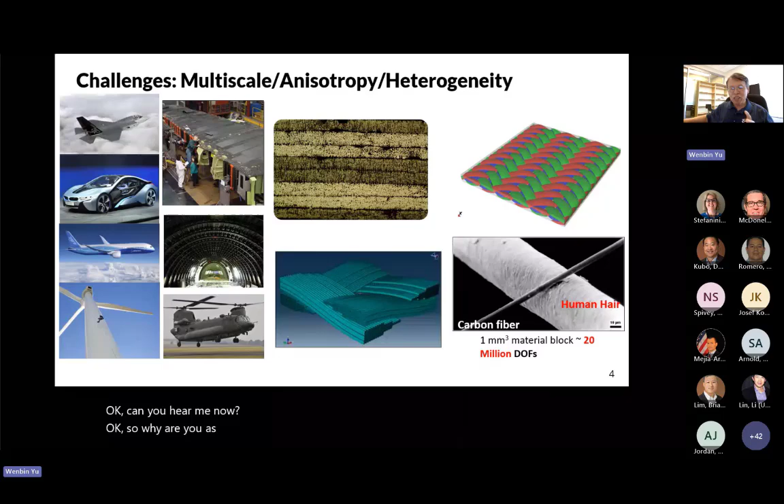I think you've been muted. Can you unmute? Wenbin, you just went mute. Sorry, I clicked the wrong button. Can you hear me, Dr. Yu? He's still mute. Where do I need to go to unmute? Okay, can you hear me now? Yes, sorry about that. Okay, so Guan Yu, as a host, you should be able to unmute me, right? Can you? You are good now. Okay, good, we'll continue. I don't know what happened there, but let's continue.

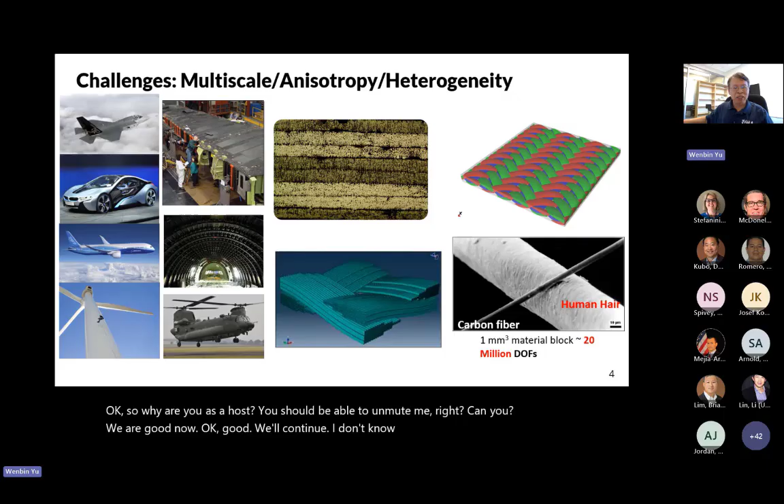So we build systems in the size of meters or hundreds of meters, but because we want high performance and lightweight, we use carbon fibers mostly and glass fibers. They are in the size of microns, and clearly these composite structures are anisotropic, heterogeneous, and multi-scale.

It's impossible for us to capture the structure performance directly while at the same time capturing the details of carbon fiber and all the reinforcements. So some type of multi-scale modeling and homogenization must happen.

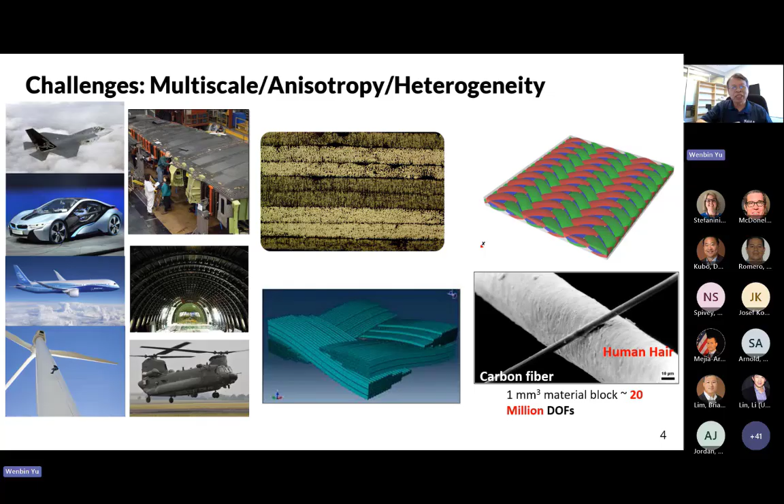And of course, in the field, in the past several decades, we have numerous multi-scale methods developed, but most of the methods are what I call a bottom-up approach. What I have been looking at—because if you know my background, I started from how to model rotor blades, so it's structural mechanics—I would like to look at the system from the top-down level.

So for a sophisticated system like the Boeing 787, when you do structure analysis, it's a combination of 3D solids, 2D plates and shells, and one-dimensional beams or thin-walled beams, depending on the geometry of the structure.

If the three sides of the body are of similar size, then you treat it as a 3D body. If one dimension is much smaller than the other two, you model it as a panel, which could be curved or flat, shell or plate in the modeling concern. If one dimension is much larger than the other two, you have beams, and beams of course could be curved. If all three dimensions are of different order of magnitude, you have thin-walled beams.

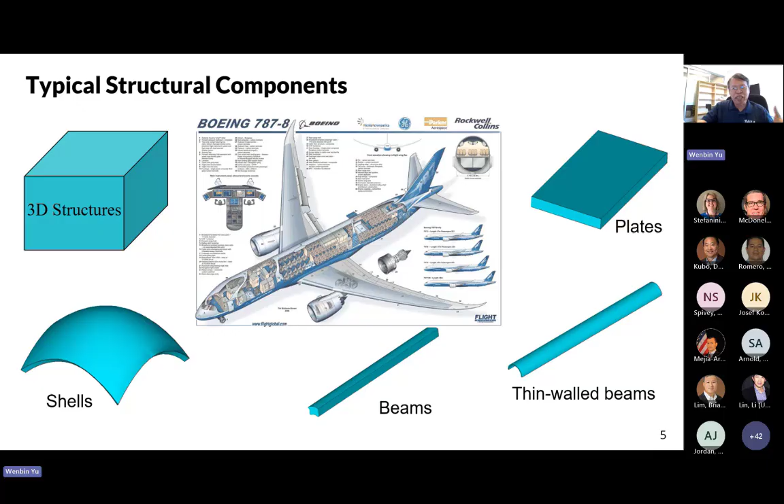Of course, when you model it and do the numerical analysis, you have beam elements, plate elements, and shell elements.

So from a top-down perspective, to design a structure, we first decide what kind of structure elements we will use. Then we identify how the structure is made, what kind of microstructure it has, and what information the material folks can provide us. So we could have what I call the structure genes, the fundamental building block of structure.

Then you effectively have two model representations. The method I created, called Mechanics of Structure Genome, minimizes the information loss between the microstructure and the structural representation needed at the system level.

It is a formal framework compared to most other multi-scale methods that do not exclusively rely on direct information passing through the scales, but rather operate from the homogenized behavior you want at the structure level, then capture details at the scales relevant to a particular design need.

For example, we may want the torsional stiffness or bending stiffness of a wing in terms of a particular wing configuration. This is also part of this framework. We implement our theory into a commercial code, now called SwiftComp, which can carry out general purpose multi-scale constitutive modeling for composite structures and materials.

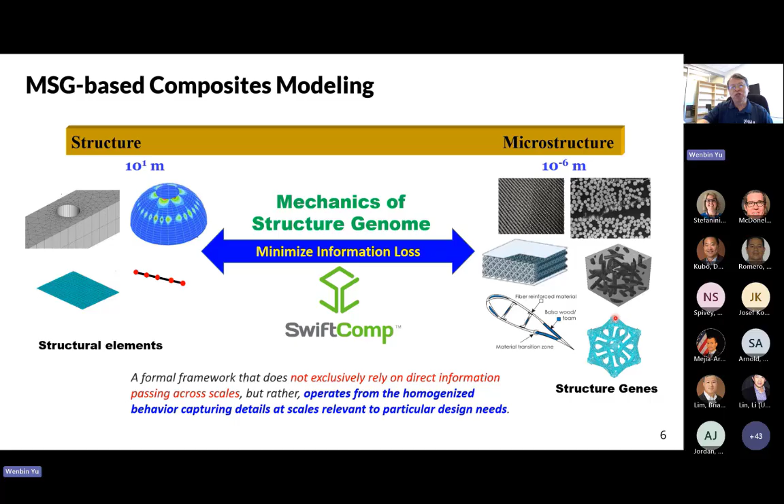And you'll also realize I define composites in a very loose term, as long as it features anisotropy and heterogeneity, that's a composite material, not necessarily the traditional unidirectional fiber reinforced laminates.

The concept of structure gene and structure genome is borrowed from biology. A structure gene is the smallest mathematical building block of a structure.

So do pay attention to the word mathematical, which means if you can carry out the mathematical operation of representation to build the structure, then that will be okay. So you need to go to the smallest. Then the structure genome is basically composed of all the structure genes.

You could have different structure genes for one structure, but they need to form the structure. For example, if you want to model a rotor blade using beam elements, then each cross-section is a structure gene, but the complete set of structure cross-sections used to represent the blade becomes your structure genome.

The structure gene could be one-dimensional. For example, if you deal with laminates, a one-dimensional structure gene will be good enough. If you're dealing with unidirectional fiber reinforced composites, you can deal with a two-dimensional structure gene. And of course if you deal with a beam, you deal with a cross-section, that's a 2D structure gene.

But if your building block of structure indeed features three-dimensional heterogeneity, then you need a three-dimensional structure gene to represent that.

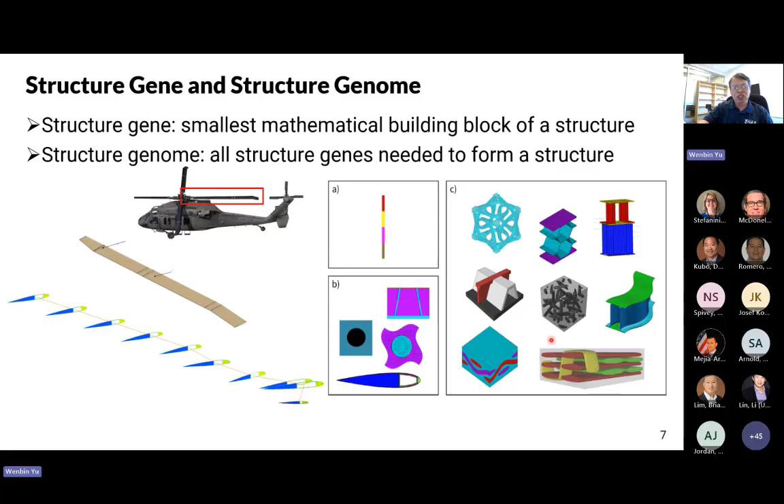To further explain the concept of the mechanics of structure genome, I will use beam theory, which is familiar to everyone in the audience right now, as an example to explain how we do the problem, and how MSG relates to the ancient theory of beam theory.

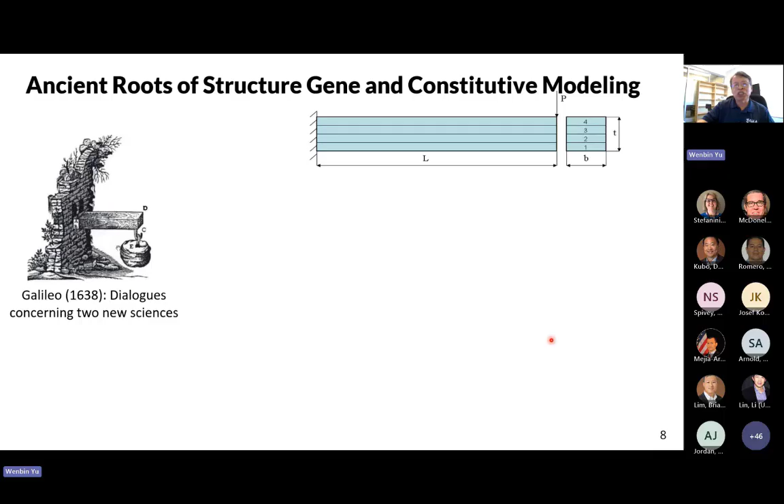For example, when we try to model a cantilever beam, what we do is look at the beam and what it's made of, then take its cross-section, and compute the so-called beam constants: EA, EI, GJ, and GA, which is the transverse shear stiffness.

And then we basically homogenize it to a one-dimensional problem to solve a deflection problem, for example. But we didn't stop here, we need to go back.

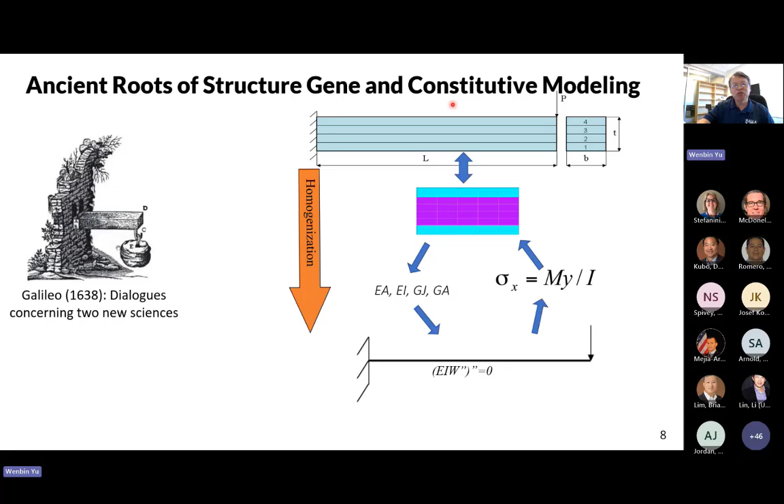And you'll find out that going from the original three-dimensional structure to this one-dimensional representation is a homogenization. And this beam analysis is the macroscopic analysis, if you want to call it that.

And then to get the stress in terms of the shear force and bending moment diagram, this kind of stuff, that is dehomogenization. And this procedure is the constitutive modeling. Of course, this does not appear in our undergraduate mechanics of strength of materials course.

Because we make assumptions, then this calculation becomes simple. But usually those assumptions only work for isotropic homogeneous materials. When you go to composites, a lot of assumptions are not realistic, and then you need a theory to do the constitutive modeling. But you still solve the same problem, although your structure is made of more advanced materials enabled by current manufacturing techniques.

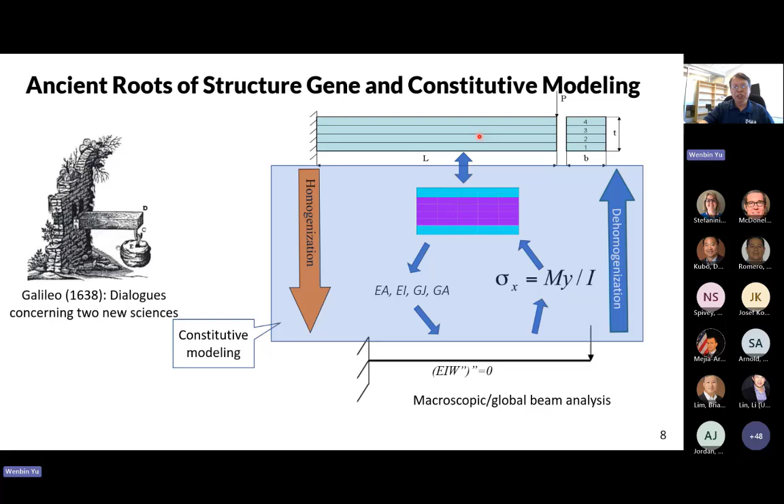I also want to explain a little bit more about the structure gene concept. As I said, if this system level analysis requires 3D solids, then you look at your microstructure. If it's a layered material like a laminate, you want the 3D properties, then you have a one-dimensional SG representation. If you have unidirectional fiber reinforced composite, you have a 2D representation. If you deal with woven composite, you need a 3D.

Despite the different dimensionality, you can call it the representative volume element, but it is not. I call it SG here. The 1D, 2D, 3D - what you want is, for example, for linear elastic analysis, you want the 6x6 stiffness matrix for your 3D elements. And also, after you've done the global analysis, you want to go back to find out what would be the critical stress inside the original microstructure.

So this one-dimensional analysis can compute all your shear modulus, Young's modulus, Poisson's ratio, and also can compute all the stress components, although it's a one-dimensional analysis. Similarly for this two-dimensional analysis for unidirectional fiber reinforced composites, the same purpose can be achieved.

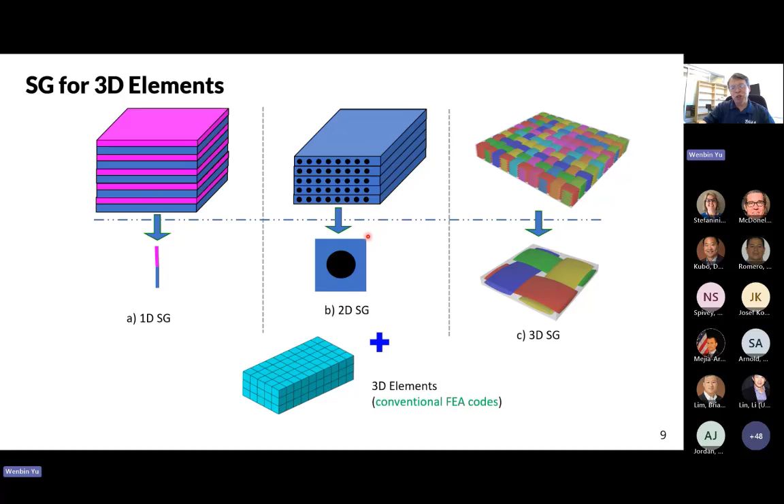But most of other approaches, particularly finite element-based approaches, if you're based on 2D domain, you can only get the two-dimensional properties. You have to try very hard to get the transverse shear modulus, for example, also get the out-of-plane stress components.

And the same idea can apply to panels. For example, you have a panel you want to model as a plate in your structure level analysis. If the panel is made of laminate, then you have 1D SG. If you have a corrugation along one direction, you have 2D SG. If it's made of woven or the stiffness runs in both directions, you have 3D SG. What you want is the equivalent plate properties for your plate analysis.

For example, if you're dealing with Kirchhoff plate analysis at this level, then you're talking about computing the ABD matrix from this guy, or from this guy. After you've done your plate analysis, you have force and moments, then you can do the dehomogenization to get the stress that happened at the original real structure level.

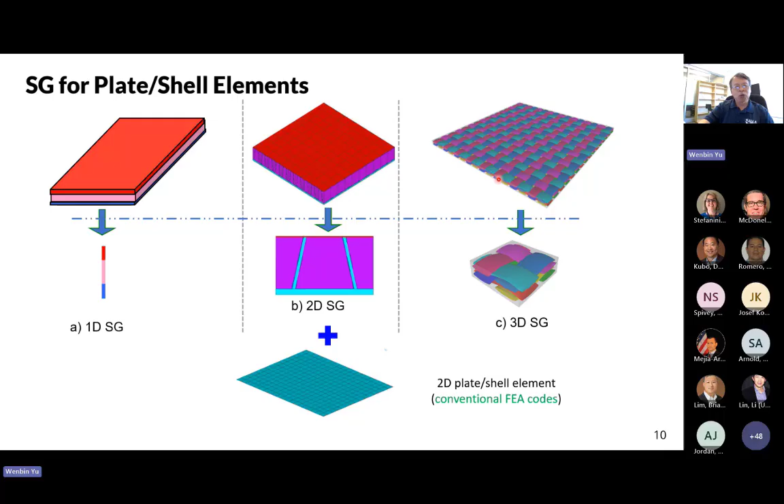Similar idea you can apply to beams. You have a slender structure, depends on the heterogeneity. If it can be viewed as if made of constant cross-section or piecewise constant cross-section, then you deal with a 2D SG. And if you have heterogeneity along the spanwise direction, for example fixed wing aircraft, you do have heterogeneity along the spanwise direction, you deal with a 3D SG.

And at the end of the day, what you want is the shear modulus, Poisson's ratio, shear center, all these beam-related properties for your beam analysis. After you've done your beam analysis, you can get 3D stress.

For those who are familiar with my research, this part was a significant part of my PhD thesis back in 2002. Yeah, I defended that in 2002. That's 23 years now. And that is the basic concept of SG.

Then if you want to go to theory, do some derivation, there are, of course, some equations, a lot of papers you can read. But if you really look at it, there are only three basic steps. The first step is to express the kinematics of the original model in terms of the model you want, which is the macroscopic model. For example, this is the three-dimensional displacements, but this U bar could be the displacement rotations of your beam theory.

Then you have something you don't know. Traditional structure mechanics calls it a warping function. In micromechanics, we call it a fluctuation function. After we have this displacement expression, we can get the strain expression in terms of the strains of the global model, and also some gradients of the unknown, which is unknown. The traditional method usually assumes it to be a certain polynomial of the smaller dimensions.

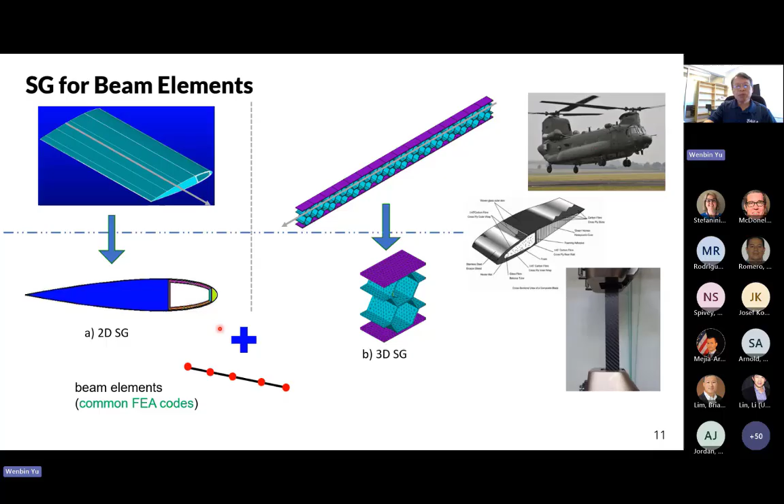Okay, so that's simple enough. Then it depends on specific applications, and recently we derived a theory, basically this SG represented by shell elements. For example, you have a lot of current metamaterials. They have very thin cells to make this heterogeneity. So the SG is represented by shell elements, but at the end of the day, they want a geometrically exact beam theory. That can also be done.

So this displacement will be in terms of, say, if you use Reissner-Mindlin plate theory, it will be plate displacement and rotations. Then this will be your geometrically exact displacement and rotations.

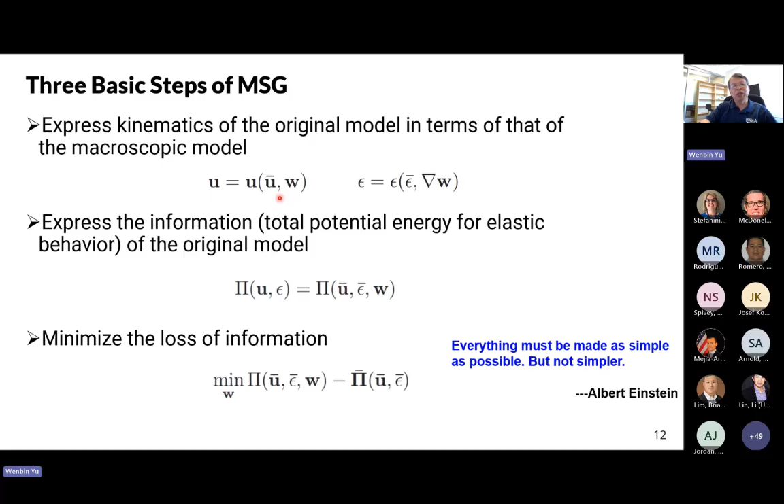Okay, we use a few examples to show how this method works. This is the metamaterial in a paper published in 2017 in Science.

And what has been done there is they discovered a three-dimensional metamaterial with chiral behavior. Basically, when you push it, it will twist. And in that paper, they used a high-order continuum theory to describe the behavior.

But for me, I think it is a confusion between material behavior and structure behavior, because if you have this unit cell repeated along all three dimensions, then you will find out this so-called chiral behavior disappears.

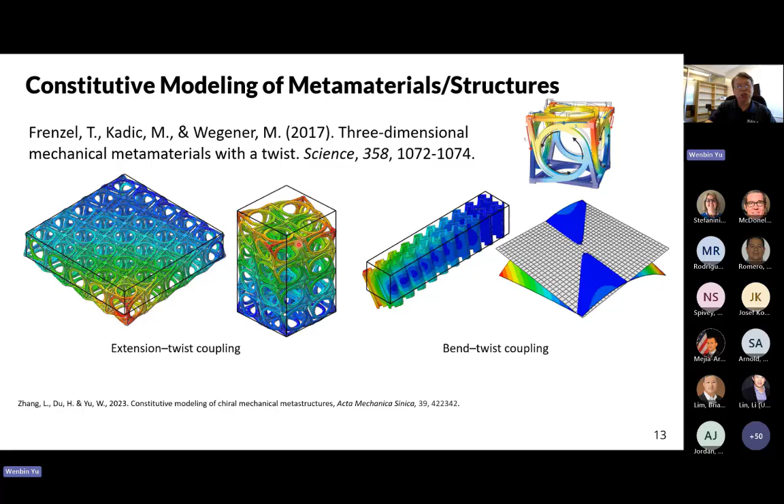And if you view it from the structure level, we did some work there, and we could reproduce what they observed, and published a paper a few years back. And this MSG enabled us to do something very interesting.

For example, traditional multiscale micromechanics homogenizes to a point, but now we can homogenize to an element. So for example, in my global analysis, I want a 20-noded solid element, a 3D solid element to do that. Then you have basically 60 degrees of freedom.

So we can use MSG in such a way that whatever the original heterogeneous system meshed here, you could have ply drops, all the heterogeneities and all that stuff. It can be homogenized to a solid element.

That way, basically, you somewhat avoid the scale separation assumption. But the result would be a 60 by 60 effective element stiffness matrix, not the traditional Young's modulus and Poisson's ratio anymore. And of course, with this effective element stiffness matrix, you can assemble it and solve the problem. After you solve the problem, you have the nodal displacements and all that stuff. You can do dehomogenization to get the stress-strain distribution of the original heterogeneous material.

Similarly, you can do beam modeling. So for example, you want to use a three-noded beam element for your structure analysis, but your wings have significant tapering and heterogeneity along the span. Similarly, you can mesh whatever you have, but when you do homogenization, it depends on which structural elements you want.

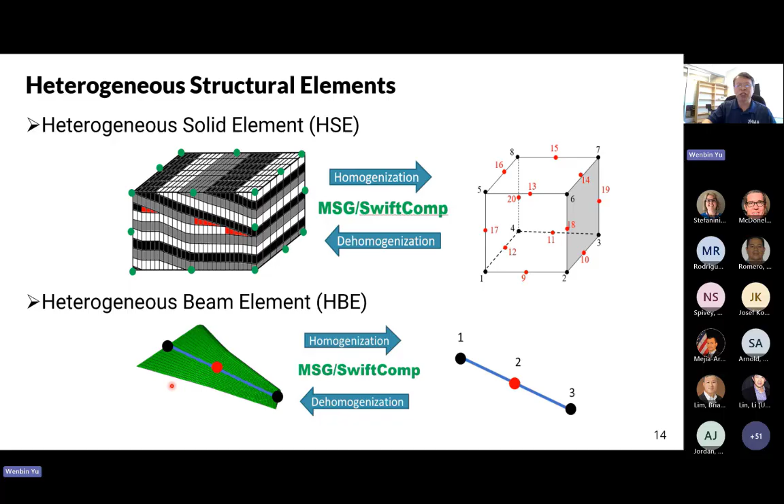You will get, for example, if it's a single beam element with 6 degrees per node, an 18 by 18 effective beam element stiffness matrix. After you solve the beam problem, you can do dehomogenization to get the stress there. And we have results showing that this type of approach performed pretty well, much better than Abaqus solid composite solid elements.

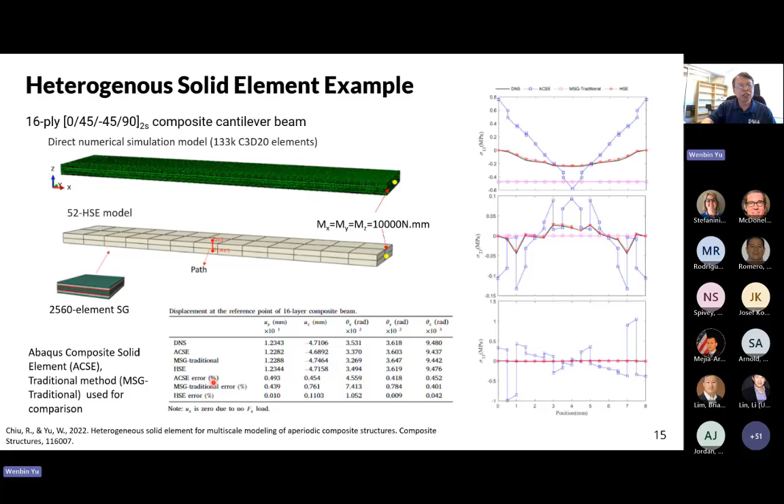And we have many other examples as far as physics-based modeling is concerned. This chart summarizes what we have done related to MSG and SwiftComp. Basically, it can take any arbitrary microstructure—it does not have to be rectangular or cuboidal. It can be arbitrarily curved, as long as you think, as an engineer or analyst, that it's represented enough for your structure. We can take that block of material, do a homogenization through the principle of minimum information loss to get the equivalent structure properties, and also perform dehomogenization to get whatever stress and failure you wanted. We also apply this very recently to progressive failure analysis.

It can be used to perform virtual testing of materials and structures, and also to model structures—not just composite laminates, but different build-up structures and sandwich structures. So that's good.

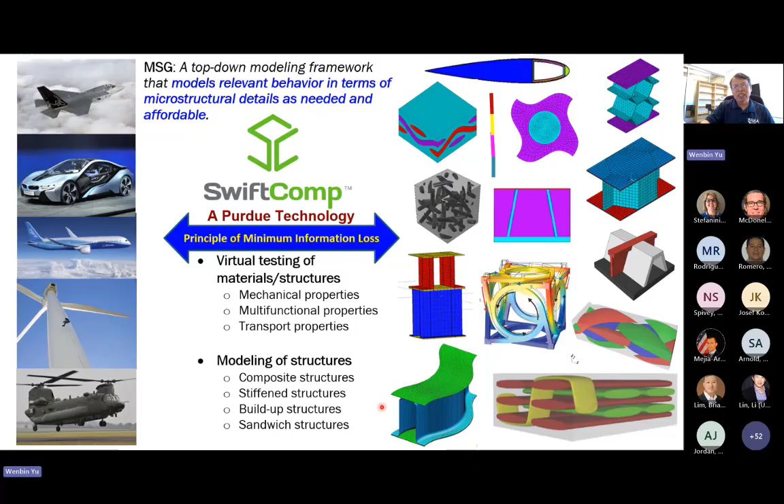Looks like we had a pretty good theory here, and the problem, but not completely solved. So what are the challenges, particularly to use it for a real industry environment, and what are the unsolved problems? That's where the new game in town, AI, comes into play.

We started more than 10 years ago now. I had a student who said this material mechanics, composite mechanics stuff is pretty boring—he wanted to do something more popular, which was machine learning and AI at that time. So I challenged him to think hard about what challenges the traditional method cannot solve, so that it could be used to solve them. So we identified a few challenges.

The first challenge, of course, is the high computational cost for complex 3D microstructures. For any of you who did multiscale modeling dealing with complex 3D microstructures, you know what I'm talking about.

The second challenge is that we idealize the microstructure. The microstructure, through a complicated manufacturing process, is usually not so idealized and has a lot of randomness.

Also, a lot of times when you go to industry, they say, oh yeah, I have code to predict composite properties—but then there are so many properties the code asks for that I don't have. So there are unknown constituent properties and constitutive models, which we make assumptions about as inputs for this type of methodology.

Of course, one code is not enough, one theory is not enough. This only bridges the microstructure to the global structure, but usually we need to link to the manufacturing process simulation code and also integrate with finite element global-level simulation code or multi-body dynamic simulation code. So interfacing with other codes to form the end-to-end simulation is not easy.

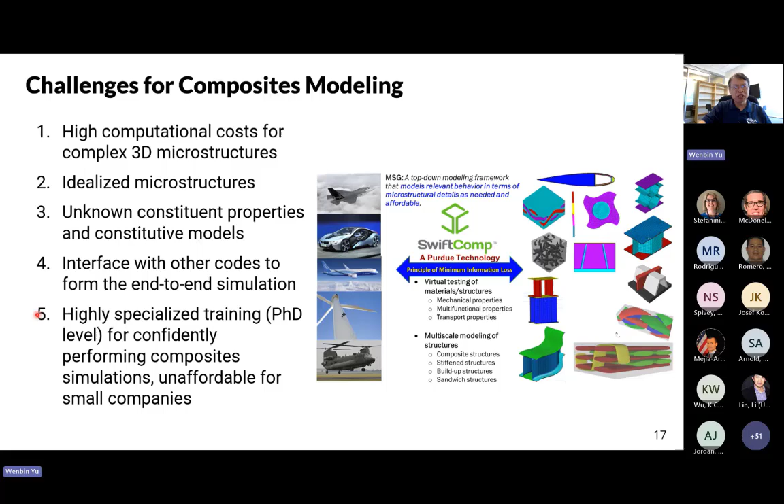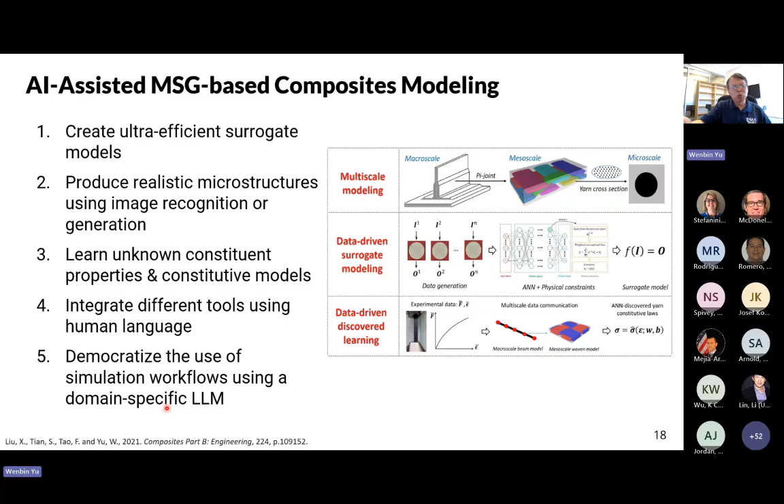So, AI-assisted composite modeling—what we have done in the past almost 10 years is try to create the ultra-efficient surrogate model and also produce realistic microstructures through image recognition or generation. That's one possibility we identified: learning the unknown constituent properties and constitutive models. And very recently, we try to integrate different tools, use large language models, and democratize the use of simulation workflows using a domain-specific large language model.

If you're familiar with what we have done, basically we're not using machine learning as a black box like TensorFlow or PyTorch or other machine learning tools. We break it up, and we try to focus on what is unknown. For example, for a lot of our composite modeling, we make assumptions about the material models.

So we did it in such a way that we break the material models in Abaqus—particularly, you're talking about UMAT. We basically represent the UMAT as an artificial neural network, trained by whatever we measured at the global level, so we indirectly match the global data. Then we still use Abaqus in a sense—whatever other tools, similar idea here. We still keep the kinematics, geometrical relations, and equilibrium equations, and replace the material models using a neural network to be trained.

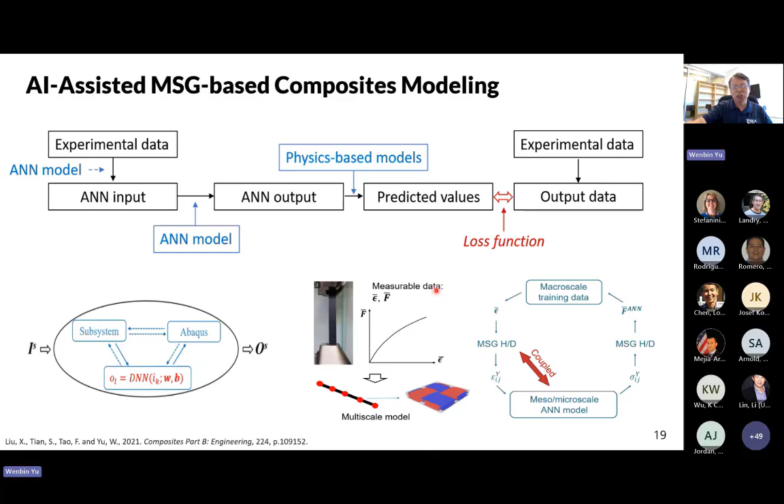After training, of course, that becomes our numerical UMAT in a sense.

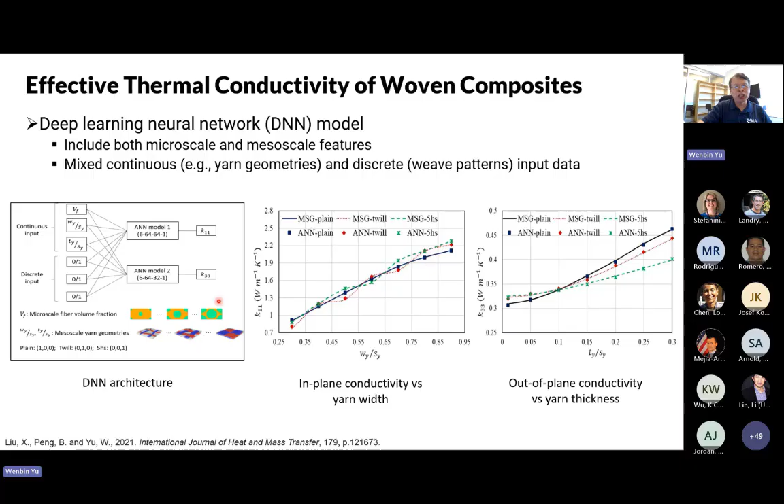We did a training for the effective thermal conductivities, where you can take continuous and discrete inputs, both geometry and material properties, and also weave patterns. This is for woven composites, and it's become pretty routine now. You basically solve the SG problem, and the resulting models can be used for design.

We try to construct a numerical failure criterion for the yarn of a composite, because usually you have fiber matrix characteristic for failure, but not for the yarn. So there's a possibility you can use multiscale modeling to construct a numerical failure criterion for the yarn, then calculate the failure of the woven composites.

We did a 2-scale homogenization from the woven to the yarn level to the fiber level, and also used machine learning, our deep learning model. We found we can get a very close agreement for the predictions. But you have to realize that generating the training data is a significant time cost.

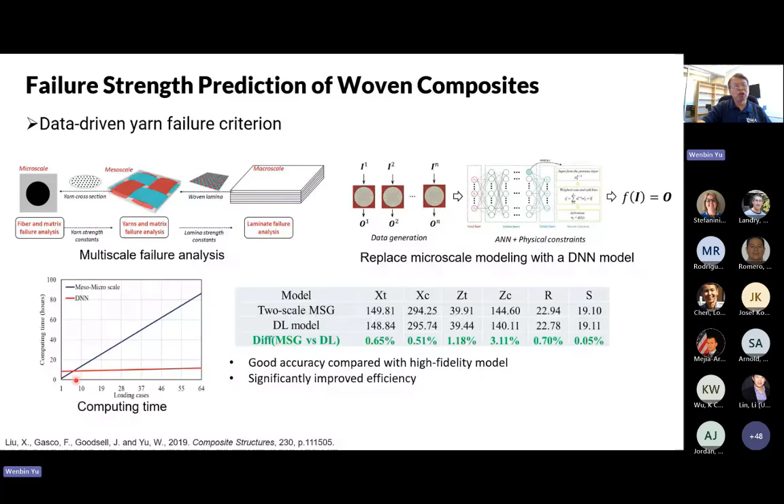So it's only at a certain level, where you have to use the model many times, that you reach a break-even point. For this case, you need at least 5 or 8 load cases to break even. This next part is about training constitutive models using indirectly measurable data.

That partially solves the lack of data problem, because usually when we measure data we use the ASTM standard or certain limited tests. But if we can connect the data from the structures—for example, here I have a cantilever beam with a force, I measure this point and get the full load deflection curve—then I can have this NN model embedded in my finite element analysis to train it.

We found that we actually have the possibility to learn a highly nonlinear stress strain curve for the material, and also, if the material is damaged, we can learn the damage and strain relations as part of the constitutive relations.

This is a laminate. We learned the lamina constitutive model based on the laminate response—a similar idea to before, which was the homogeneous case. This laminate has a different layup sequence, but we don't know the failure criterion for it or how it will fail. I do have measurements at the laminate level though, so that's what we used, and we found we can get good agreement with this methodology.

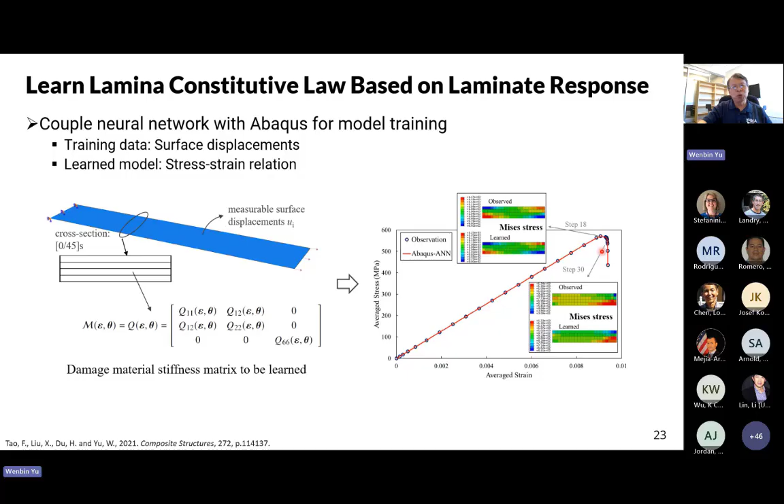So that's basically what I call the non-generative, traditional machine learning type of approach. You have paired data, then you do training using neural networks to come up with a surrogate model or infer some of our unknowns.

The generative approach, particularly large language models, has become popular in the last two years. We used generative AI to do inverse design. For example, we developed a numerical regression transformer using masking and tokenizing of material parameters, so that you don't have to do an optimization problem to get the input if you know your output.

But in my mind, the low-hanging fruit for generative AI, particularly large language models, is really helping us consolidate and deliver the knowledge we have, so that the sophisticated codes we have can be put into the hands of everyday engineers on the shop floor.

So imagine a platform that can provide real-time, precise, authoritative answers, consolidating all knowledge in composites, integrating all tools in composites, and incorporating the insights of world leading experts. You don't have to talk in highly technical language—you can use natural language like the conversation we're having now. It can be used on all platforms through a chat interface like ChatGPT, and also engage experts for quality control and reinforcement learning.

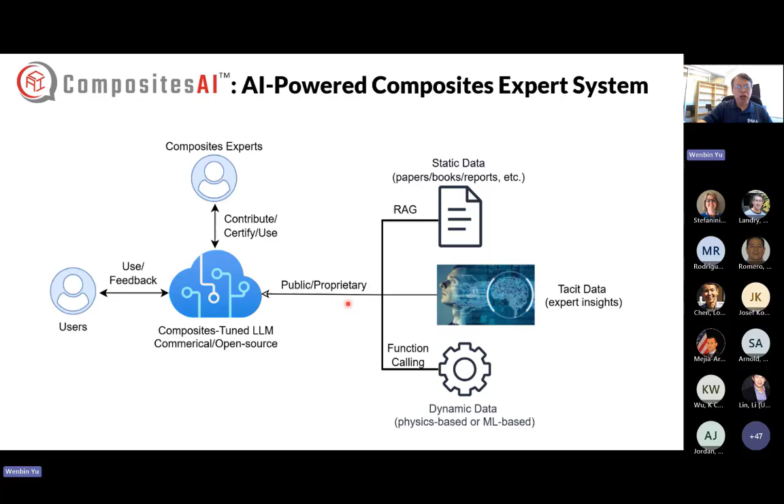I will use a few examples to show what it can do. First, you can ask questions and it will deliver answers. This is similar to ChatGPT, but if you ask a question like the upper bound of the Young's modulus for a two-phase isotropic composite...

ChatGPT usually gives you the rule of mixtures according to the Voigt definition, but they don't have this part, which is only true when the Poisson's ratio of the two phases are equal. If they're not equal, you have a different one. So this is additional knowledge, what's called expert knowledge. It basically provides the guardrails for it to be more precise.

Another interesting capability that the large language model can help us do is use human language as our input file and also as our programmable language. You can, through chat or voice, execute sophisticated simulation codes and guide the process of preparing inputs and understanding outputs. This is actually motivated by a real story.

Some of you know our center director is Dr. Byron Pipes, and he was trained before finite element analysis was available. So usually if he had questions related to micromechanics, he would come to me. One day he said, Wenbin, I don't know how to find the transverse shear modulus of a composite, can you calculate it for me? I said sure.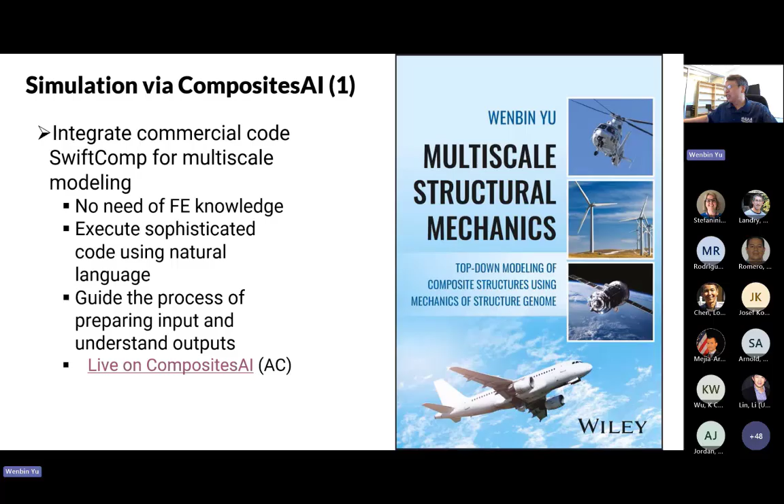Let me show it here. If you look, I said for unidirectional fabric info, I would like to know G1,2 and G2,3 - do you have a tool to help me compute this? It says yes, I have a tool, but it requires inputs. So I say I have an isotropic fiber with Young's modulus and Poisson's ratio, isotropic matrix, hexagonal microstructure, and volume fraction. Then it gives me the results.

This prompt is directly from Dr. Pipes' email. He said your numbers are a bit high, try EF and the Poisson's ratio of the fiber and the EM and Poisson's ratio of the matrix. So that's what he sent me - I directly copied that email and put it here, and the system took that prompt, recalculated, and gave the results.

So that's one case showing that now we have the possibility to use AI to execute sophisticated micromechanics code or meso-scale simulation for us.

The second capability is that it allows experts to contribute. I already mentioned this model - it was trained by Professor Xin Liu at UT Arlington. Usually as researchers, we develop the model, we publish a paper, and we're done.

So what I did is I asked the model he trained, sent it to me. I dumped it into CompositesAI, and now it's live and can be used to answer a lot of questions. Let me show what I did here. I just took that model, made it API compatible so the large language model can understand it, and now we have the model in the system.

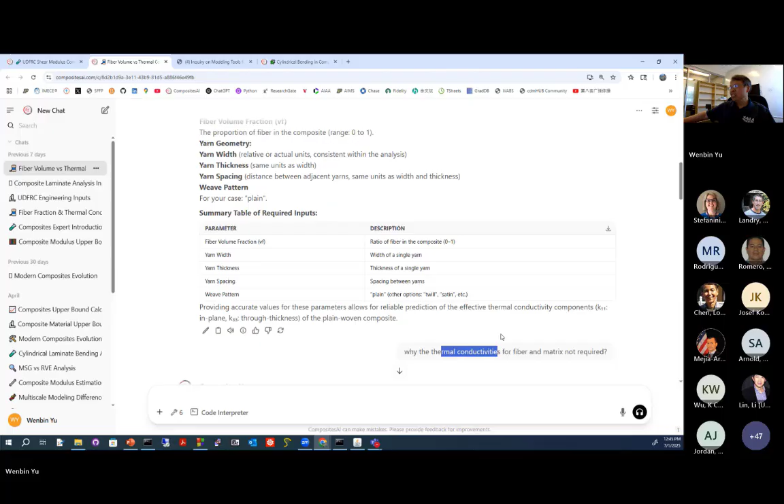I want to make sure it's not just making up stories for me. So I asked, to compute thermal conductivity for a plain woven composite, what inputs do you need? And it listed all the inputs. Then I found out it didn't have inputs for thermal conductivities of fiber matrix. The system was intelligent enough to explain that, because when I did the training, those model assumptions were fixed, so they weren't design parameters or model parameters used to train the model. Okay, I said, now I understand.

So I asked, can you run optimization for me to seek the minimum in-plane thermal conductivity and maximal out-of-plane thermal conductivity among all the inputs you can explore? So it varied the design inputs or model parameters as a design space and ran the optimization for me for different configurations.

I also asked, can you treat the different weave patterns as design parameters to run this optimization again? Then the system did it for different plain weave, twill and five-harness satin, and gave me the results, showing the corresponding maximum and minimal thermal conductivities.

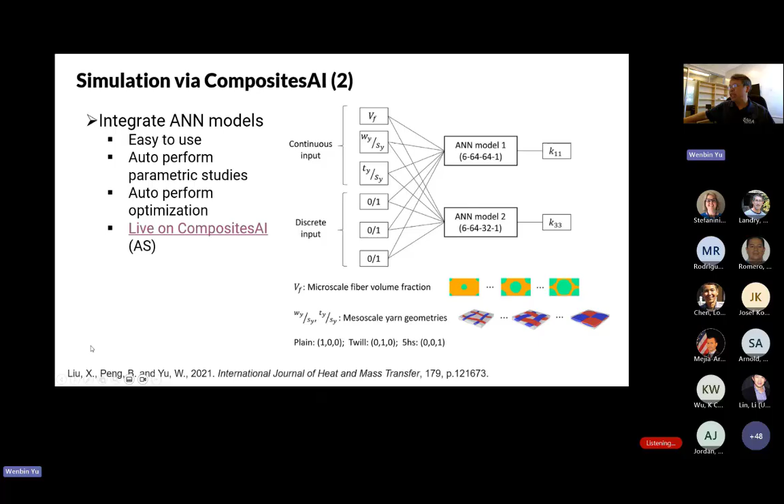So basically, with the large language system and AI, we can take something originally static on paper and make it live, significantly expanding the use of the model. You don't have to write the optimizer yourself - the AI knows how to do optimization. You don't have to do the parametric study - AI knows how to carry it out automatically. You save a lot of effort doing that.

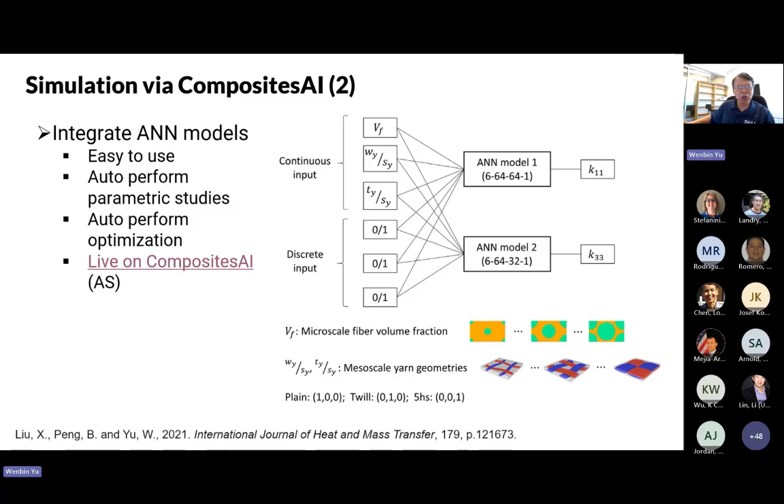As I mentioned, we also need experts in the loop, because AI could make mistakes, and often does, particularly depending on the data you put in. So we built a system where experts and AI can interact - not only can experts contribute data and certified knowledge to the system, but they can also interact with AI and with non-experts. I have an example here.

So this is a question asked on this platform, from a student I think in Europe. They sent me an email to ask the question first, and I said, why don't you ask on the platform? So I replied to the student there. Then I realized the student also thanked me for my answer. Then the admin said, why don't we try the AI?

So we added CompositesAI, asking can you answer this question or not? Then AI began answering questions for me on this platform. If you compare the answers, you'll find that if it's not better, it's at least as good as what I answered that student. By the way, this question is directly related to my course, so I'd claim myself to be an expert there.

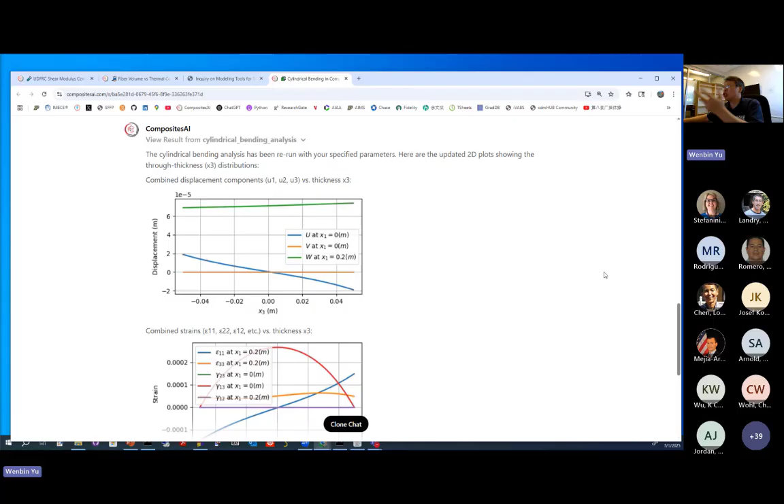Yeah, that's basically why you need an expert in the loop. If you look at the system, it allows you to do the feedbacks. Let me look at here, let me forward. By the way, you can also do a plus in the chat system. It will allow you to do the feedbacks, and you can provide feedback that it really doesn't make sense.

For example, you could say this one may be wrong, let me sign up on that. Let me see this one. Yeah, so you can read it, and you can also tell the reason why, and provide feedback to us. You can also go to cdmhub.org to debate or discuss with others, and we will collect this information and further refine it.

If you remember, if you keep watching generative AI and large language models, when ChatGPT was first released in 2022, I think the end of the year, the results were laughable. But now it's getting more and more accurate, and for most general tasks it's pretty good. So at this moment, maybe it's mostly my knowledge — questions related to my knowledge, they're pretty good. But for some other knowledge, we need more contribution and more feedback to help improve the system.

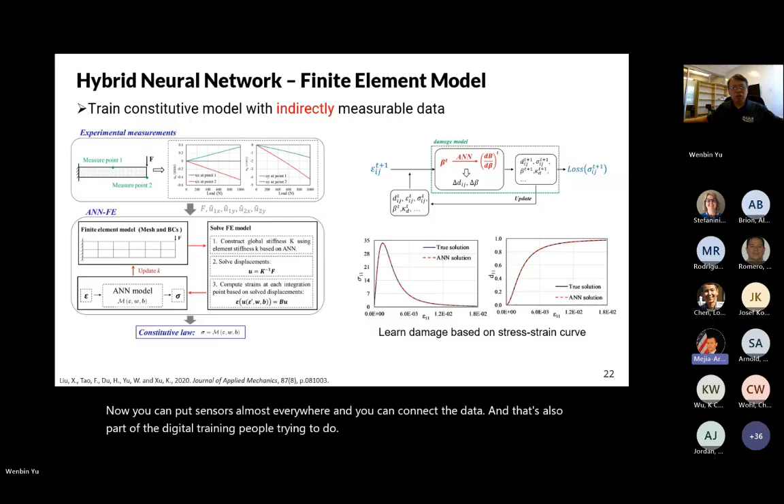Sounds great. How can we collaborate with your community or with your university and your group of researchers? Well, how do you usually partner or work with another researcher? If you're into sharing, you can basically become an expert on CompositesAI, and then you can contribute your knowledge and your tools to be used by the entire community.

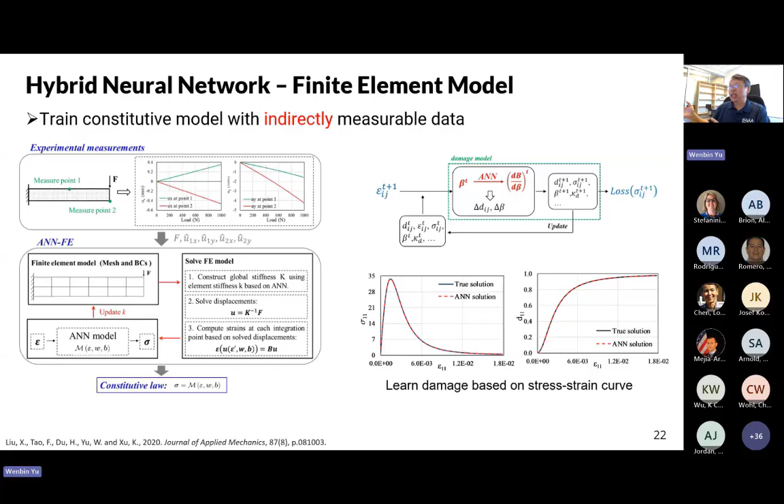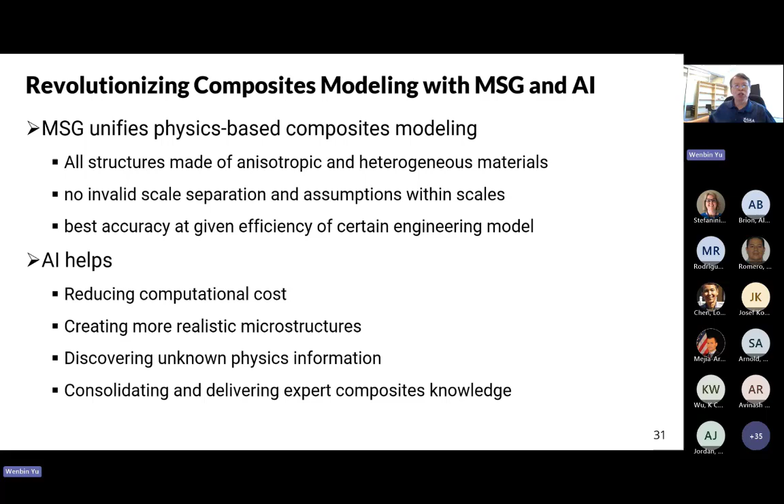And for the cdmHUB community, that AI interactive community, it's just a technical forum. You can post questions, you can answer questions, you can also interact with the AI as a chat there, and everybody can know. This is kind of like a ChatGPT for composites, but it has the possibility for you to become one of the developers to contribute your own domain knowledge there.

And also, when you contribute domain knowledge, you don't have to share it with the general public. You can choose whom you want to share it with. Say, for example, you want to only share with the composite group at JPL. That's also possible, and the system allows you to do it.

Sounds great. So we're almost there in time. We still have a minute and a half. I may have one more question, but it's not quite directly related with what you were presenting today. Anyone else have a question before I do the last one? So my question is related with the last talk that somebody gave.

In SAMPE, by Dr. Srikanth Pilla, it was also related with AI. The title was AI in Composite Materials and Manufacturing. Can you let us know what is the difference, or if there are similarities, between what he presented and yours?

Yeah, that's a very good question. I actually watched his talk, Dr. Pilla's talk, maybe 1 or 2 weeks ago. What he's doing is trying to use generative AI to model the system better, generative or non-generative. He has a diffusion model, which is part of generative AI, to basically do inverse design, like I mentioned - say if you have a nonlinear stress-strain curve, what kind of microstructure you should provide.